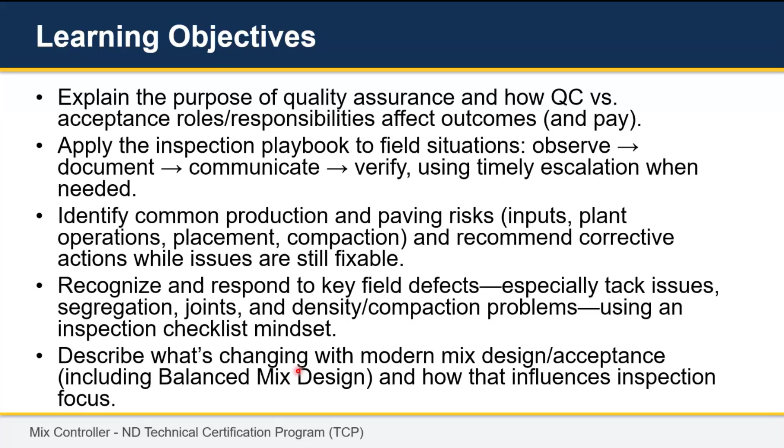And kind of give you an overview of why you might be seeing that and some of the new materials you might use. So, again, same slide I talked about yesterday for those that are repeat customers, if you will. But quality assurance is something that we do. And I often ask people, well, why do we do it? Why do we have inspectors? Why do you have testers? Why do you have sampling and all of this? Why can't you just build the roads?

Okay. The short version of it, again, much like my previous discussion, is Sharon told me I have to be here, right? The version of that is that for federal highway funding, you have to have a quality assurance system. It's mandated by regulation by federal highway on federally funded projects that construction infrastructure projects have a quality assurance system. So that's obviously the direct why. But why is that there?

Why that's there, and the little known or the little acknowledged thing, is that as great as our interstate system was, when it was built, we had fraud, abuse, money not getting spent well. And we're all taxpayers. We all want our money to be spent well. We want to assure that what I'm paying for, what you're paying for, what everyone is paying for, we get what we're asking for, right?

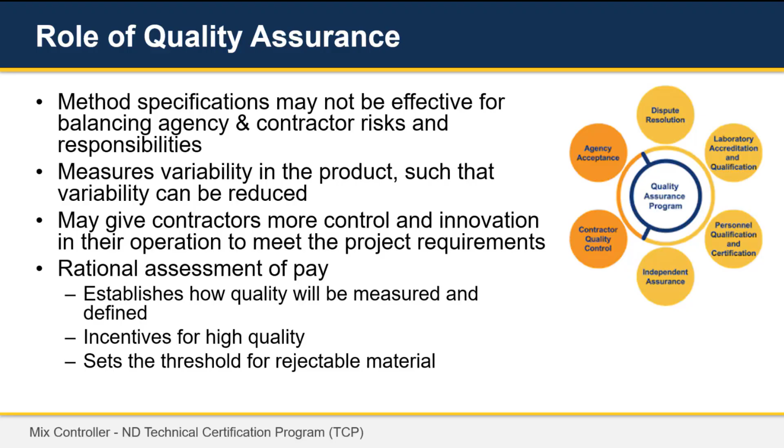And so another point that I made is that inspection and certification and sampling and testing is not something that we dreamed up as our industry. Federal Highway didn't pluck it from an idea internally, okay? It is everywhere. Quality assurance as a concept is widespread in all of these different industries. Again, I said this yesterday.

This is a quality assurance lab at Ben & Jerry's Ice Cream, okay? When I visited their plant facility, you see tests in there, they're bringing the ice cream in and they're testing it to make sure it meets what they want for quality. Healthcare, software development, cars, construction, anything has quality assurance.

The things that make us the black sheep when we compare, say, horizontal construction to maybe vertical construction like buildings, is that we have to deal with higher variability. We have to take rocks out of the ground, all right? And again, I show ledge here. I know you don't have a heck of a lot of ledge, right? You're using natural sand deposits, gravel, etc.

But what we take has a higher variability. The asphalt that we take out of the ground, we refine out of oil. That has higher variability, okay? So we have to deal with that. Whereas in manufacturing, in all these other industries, they have no tolerance for failure. The other thing that they can do that we can't do is if in a manufacturing plant they're making small parts for a car,

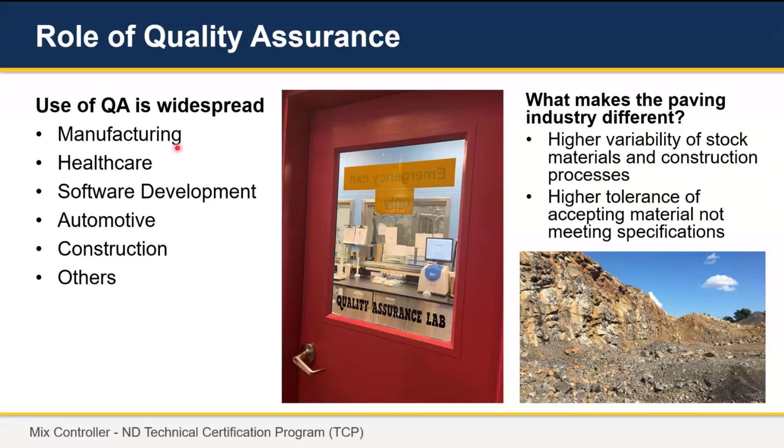So this is my big one. No matter where you are, I see the 58 people here today, whether you're testing for the contractor, whether you're in a DOT lab running gradations, or you're doing mix design as a consultant for a contractor, et cetera, you're going to see yourself fit into here. And I'd ask you to think to yourself, what is my role here?

And the two major roles of quality assurance are the contractor and the agency, the contractor and the owner: the person who's buying it, and the person who's providing it, who's getting paid to do something. So the contractor is providing or making something and getting paid to do it. The owner is taking possession of it. It's theirs, and they're buying it. So the contractor is fully responsible for quality control, right?

A colleague of mine says you can't inspect quality into a project. He doesn't mean that inspectors don't matter, all right? What he means by that is unless the people doing the work want to do a quality job, you can't just inspect it in. The people running the equipment, running the plant, making the aggregate, processing the aggregate, they've got to want to do a quality job, right?

Now, it's also the contractor's job to ensure that what they are making meets the spec, okay? Let me pause for a second and go to the other side. The owner, right? DOT, whoever it is, it's only your responsibility to figure out what the quality of this product is and how much am I going to pay. Okay.

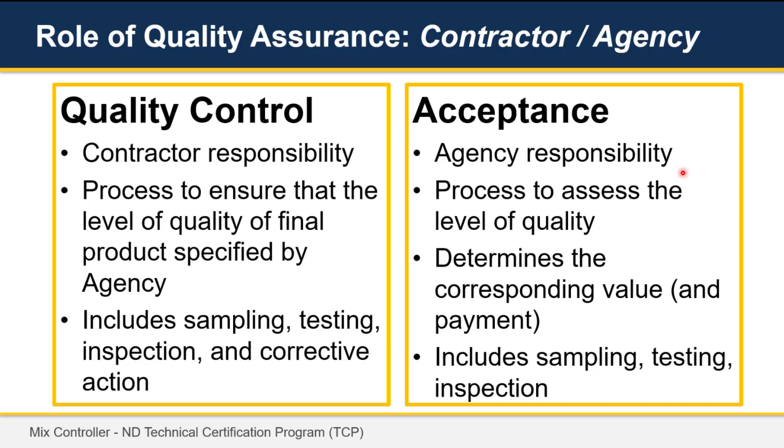And so what am I talking about specifically? What activities in an asphalt mixture world would you see and where do they fit? Okay, so acceptance. This would be something like mix samples at the paver or at the windrow, tested for asphalt content, volumetrics, gradation, maybe some BMD tests. This is actually a picture from North Dakota of some of your Hamburg samples.

Cores are an example. We talked about that with inspectors yesterday. You all take cores for acceptance, right? This is an example of the acceptance function. You're looking as much as possible at the end product and figuring out, okay, what's the quality of this? Therefore, how much do I pay for it?

Okay. Quality control is by the contractor. Something here might be, again, mix samples at the plant. I know that's not common for you. But either way, mix samples at the windrow, again tested for asphalt content, gradation, air voids, something along those lines. It's maybe a little bit simpler distinction in the field.

This is where QC is often doing nuclear density gauge testing during rolling operations, right? They don't have the time for cores. They need quick measurements because they need to make changes, make adjustments. Their primary concern is not how much they're going to get paid. It's: I want to make sure that I'm still meeting spec, okay?

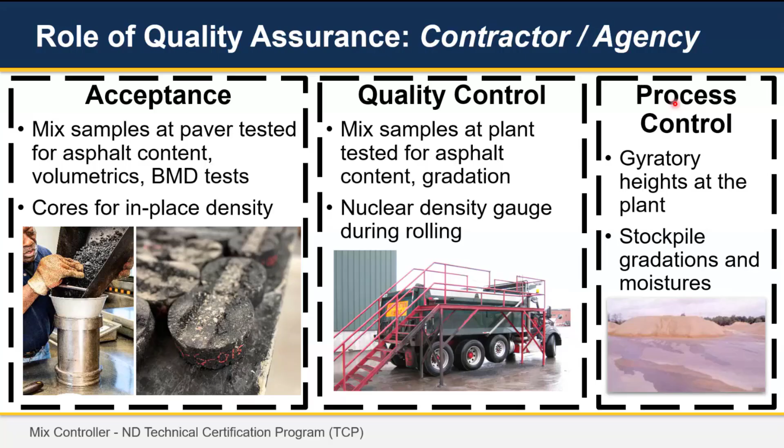An example for me, in a lot of cases, is stockpile gradations and moistures. That may or may not be required by the spec, but in order to make sure that I get good results for acceptance, I'd better be doing them. I've got to know my materials. All right, and this is the distinction. And I'd ask you to ask yourself, where do I fit in here? What testing and what activities do I do? Where am I fitting in these different roles?

An additional one, again, is inspection. All right. We can test all we want. I know we have a lot of testers in this room, right? So I'm not downplaying the role that you have. Tests tell us a lot, but it doesn't tell us everything. I can't just run one test a day or two tests a day or three tests, I don't care how many, 10 tests a day on an asphalt mixture production and know everything about how that pavement is going to perform.

We have a product, asphalt mix, asphalt pavement, even concrete, not a big fan of concrete, but aggregate, whatever, that a test doesn't tell the full story, right? How I build something matters, not just the test at the end of the day. So inspection is necessary to look at the quality of the process, how it is being done, the quality of the product itself, the mixture, and the quantity of the product. That's again more of an inspection in the field thing.

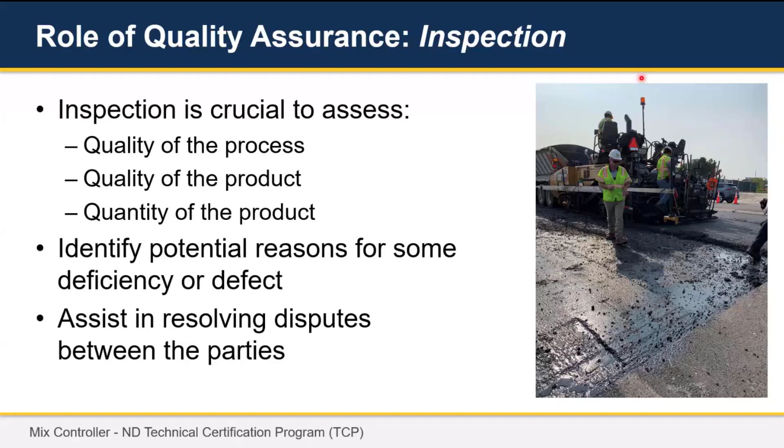And you want to know the reason for any sort of deficiency or defect, because it's going to happen. It's going to happen. And also assist in resolving disputes between parties, right? When we don't agree, when our tests don't agree, whatever that case may be. Our eyes, our ears, all of those things are useful, whether you're representing the owner agency or whether you're representing the contractor. Either one, inspection is important.

And so within inspection and a quality assurance system, your production and QC staff are doing inspections, hopefully, where you're looking at production and placement activities. We'll talk about some of those things in a plant, what I look at first if I go in a plant that's having some issues. The owner agency, you're conducting inspections. Not only looking at the product, but I'm looking at the process that's being built. And I'm also looking at the contractor's QC.

If your spec requires the contractor to do QC testing, you are paying for it. It is a service that provides additional assurance that things are meeting spec, because QC is more often than the owner tests, right? Maybe QC does 4 tests to every 1 for the owner. So it's happening more often. To me, that's a service to have additional confidence, assurance that things are meeting spec.

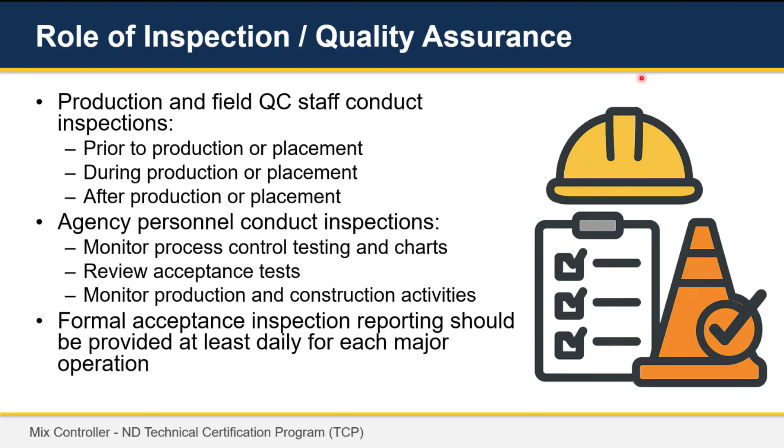We talked about this again with field people a little bit yesterday, but this could be at the plant. This could be anywhere, any inspection operation. I don't care whether it's just the owner, could also be the contractor for those of you doing QC. If I'm really inspecting, I'm going to do 3 things. I'm always observing the materials, the process, what are the results. Even for my testers out there, you may think, well, I'm just a tester. Well, how does the material look? Has it changed? You can still learn something other than just the test. So looking at all of that, documenting is important.

If you are specifically an inspector of some sort, your word is your word, right? Documentation at the time is what matters. If you ever get into a disagreement, a dispute, documentation is what matters. Not, yeah, I remember we were over here. Nope. Is it documented? It doesn't matter if it's not documented. So these are objective facts: times, temperatures, locations, quantities. Again, QC is the same way. If you're doing QC, document what you see, not just I fixed it. Fixed it is fine, but I don't learn anything from it if I don't document it.

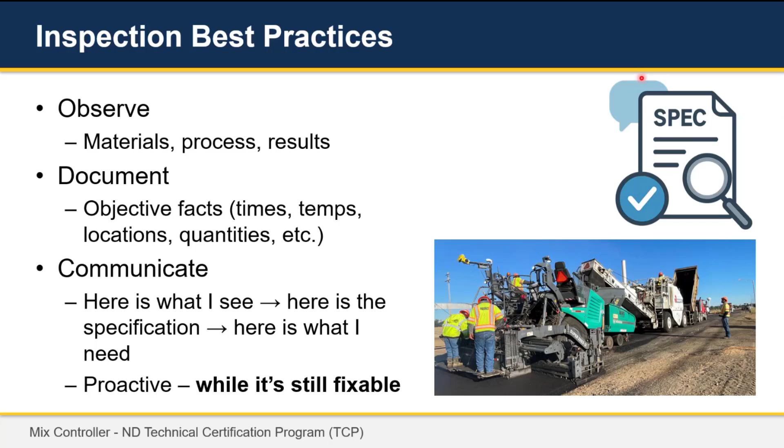So I showed this yesterday, again, more of a placement thing, but if you see an issue, what's the first three things you do? All right. Whether, again, it's a production issue, whether it's a placement issue, this is a technical term, bad looking mat. Okay. All right. So what would I do? Again, I'm just going to show this, as I know we're more testers in here.

Number one, we've got to notify someone if something is going wrong. All right. If something is not meeting spec, plant, field, I don't care. If something is going wrong, we need to talk to somebody who can actually do something about it. And this is maybe aimed towards our agency people. You aren't in control of the plant, right? You're not controlling the plant. You're not controlling production, right? You need to notify somebody who can make some corrections.

You want to document what the heck is going on, all right? Not just walk past it. Oh, you have an issue back there, okay? Doesn't matter whether they're going to fix it or not. Doesn't matter. Okay, you document that it happened no matter what. Right? Your job is to tell the story of what happened on site that day, not whether everything was okay or not, when you're an inspector.

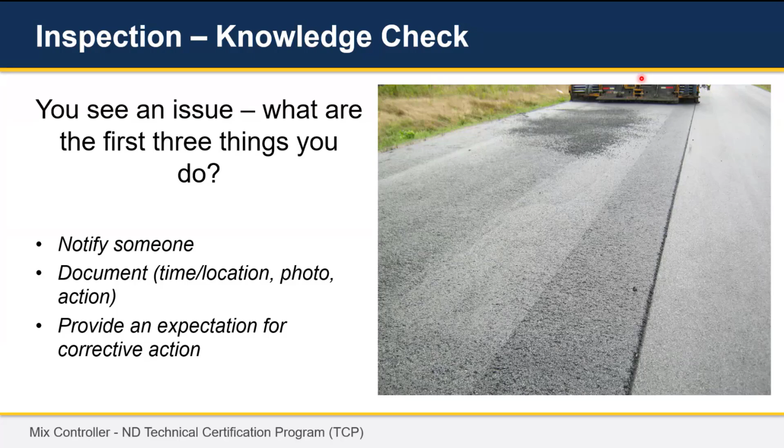And then some expectation for corrective action. Right? We're out on XYZ on this mix property. We need to get back in by the end of the day, or I'll give you this period of time, whatever it is. Okay. And so those are some general thoughts I have on inspection and everyone's role. Okay, testing is a certain part of that, right? And as testers, you have an important role in that.

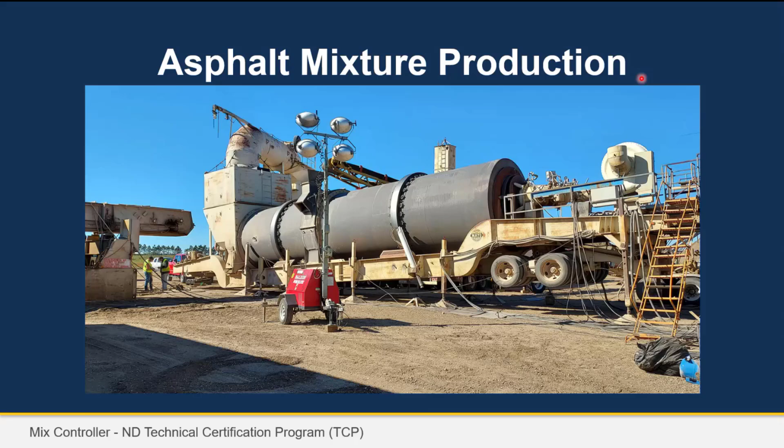So what I want to spend most of our time on after that brief introduction is asphalt mix production, right? I know some of you may not deal with asphalt mixes, you may have different jobs, etc., but this is where I want to spend the bulk of my time today. So making an asphalt mix, all right. Yesterday, for those that were here with me, we were talking mainly about placing it. Today, I want to talk about making it.

So if I think about what am I trying to do, what's my goal, when I'm making an asphalt mix, I want to take the different constituents or the parts, proportion them correctly, heat them up when necessary, and mix it into a uniform mix that meets what I'm trying to make. So I have a mix design, a job mix formula. That's what I'm trying to make. I'm not just making hot top or whatever comes out of the plant. I want to actually make what I'm trying to make. That's why we spend all that time doing a design. So I want to make that, and I want to make it consistently.

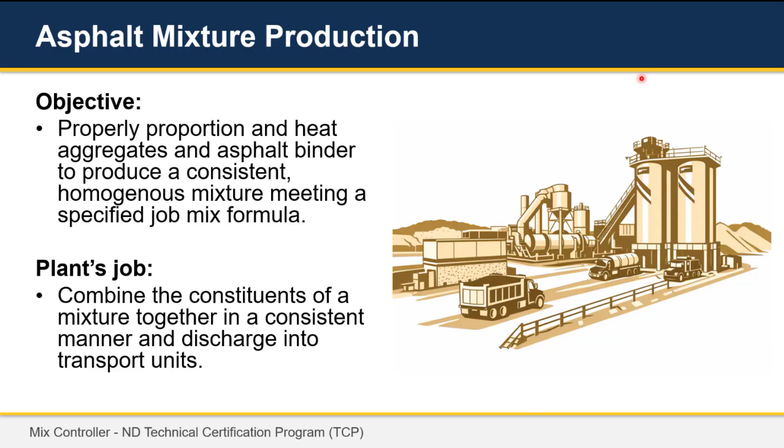So the plant's job, an asphalt mixture production facility, a plant, is to combine these different parts, aggregate, binder, RAP, etc., together, do it consistently, and discharge it into the transportation. Okay, that's its job if I really back up. So what are the ways that a plant actually does that? Number one, no matter whether you're a tester or something like that, I said this yesterday about equipment. If you're testing the material, I think you should know how it's made. Not enough to run a plant, but you should have an idea of how it's made.

So what is a plant attempting to do? A plant is trying to proportion the aggregates, asphalt, any additives, any other materials, right? So I have my job mix formula here, right? This piece of paper calls for 20% of this, 30% of this, et cetera, 5.6% asphalt by weight, whatever the case may be. I want to make that. So I've got to proportion those aggregates, asphalt, and additives. So I've got to feed those into the plant. Feed my aggregates in the cold feeds, my RAP in the RAP collar, binder comes in.

Okay. Then what do I got to do? I can't just mix the aggregate like that. This isn't concrete. Right? This isn't concrete where we want a certain amount of water, so if my aggregate is a little moist, no big deal, and I can account for that. We need our aggregates dry. We don't want water. All right.

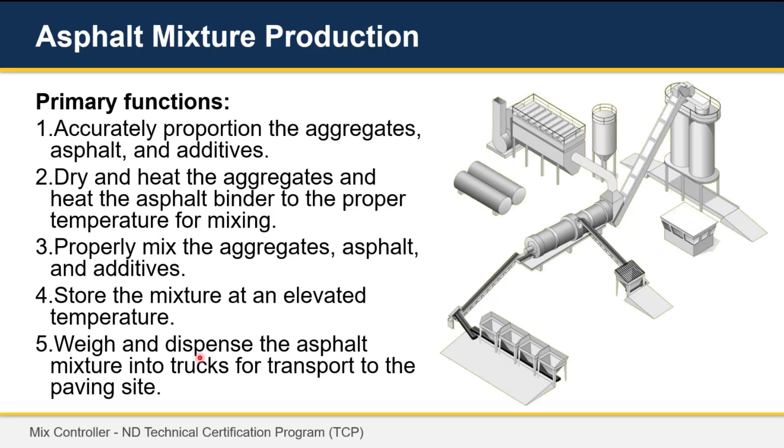So, what I tried to focus on, knowing that this is a recertification class, all right? My job is not to go through every little thing of a plant like you've never seen it. Many of you have seen it, you've tested at it, you do mix designs at it. What I want to talk to you about is the common pain points, all right? What are the common locations for issues? And so these are the items to check to ensure quality production, making sure I'm meeting specs. So if something goes wrong, I'm thinking about one of these areas.

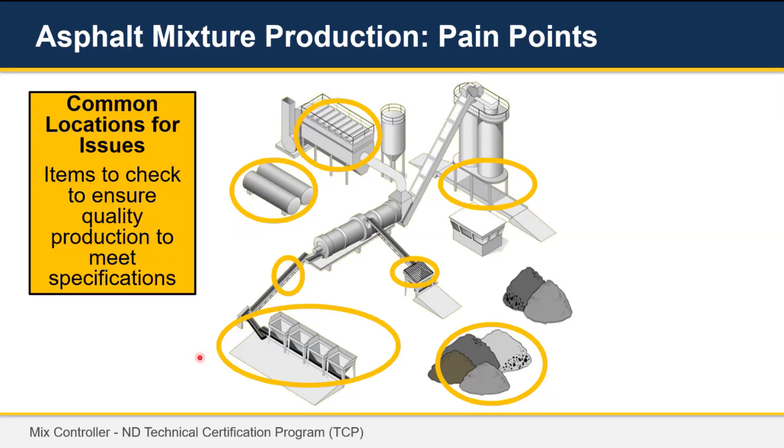Now, I could have circled the whole damn thing at this point, right? From the amount of things I circled. We could come up with a lot of different things, but these I would say are the most common. So I'll try and go through these, give a couple minutes on each. So the first one, if I go in order of kind of making the mix, is number one, stockpiles, okay? Quality starts at your feed material, at whatever I'm using to feed material.

Now, understood, North Dakota, you guys don't have a lot of ledge rock, right? You're using a lot of gravels, right? Pits, etc., are opened up. You have to deal with the aggregate that you have, right? So I would say that you have one of the most challenging situations when it comes to trying to get good stockpiles, because you don't have as many permanent aggregate sources that I can rely on, these kind of static setups. What do we see for best practices when it comes to stockpiles?

All right, number one, try and have multiple stockpiles to reduce variability as much as possible. I think that's probably a particular challenge for you all, right? If I have many different products, I can make them very consistent, through processing, etc. But if I have just kind of one gravel source, that's going to be more challenging. No matter what, I want adequate separation in between stockpiles to prevent cross-contamination.

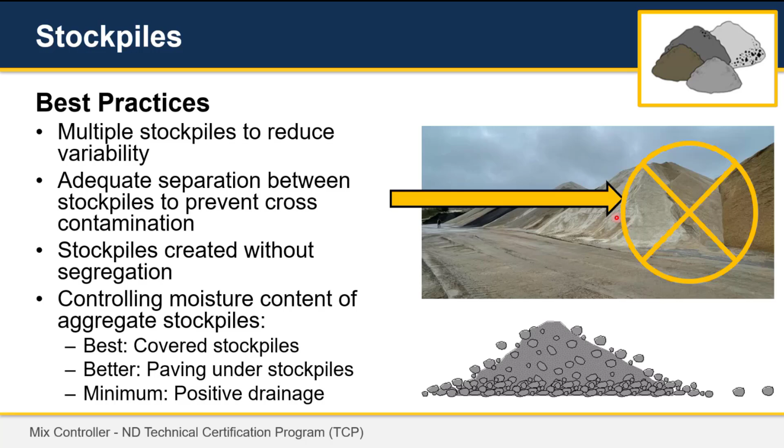Location number 2, cold feed bins. So my cold feeds, the loader operator, I use the word first here. I guess people making the stockpiles control quality first. But once we actually talk about making the mix, the loader operator has a heck of a lot of input.

I'm interested how many of you have spent significant time in an asphalt plant before? I don't know if you can raise your hand. There is a raise hand button. Yeah, I see you on video. Thank you, Don. Significant time, right? I think it's a good idea, especially if you're testing this material. Excellent. Thank you all.

The loader operator is the first line of defense, if you will. If the loader operator's having a bad day, the plant is going to show. So they really have a tough job in a lot of ways, especially if you had a lot of cold feeds. Now again, understanding the materials that you have, you don't have as many cold feeds as others. And as I've talked to Mike and others, you probably have some plants that are almost limited design-wise by the amount of cold feeds that you have.

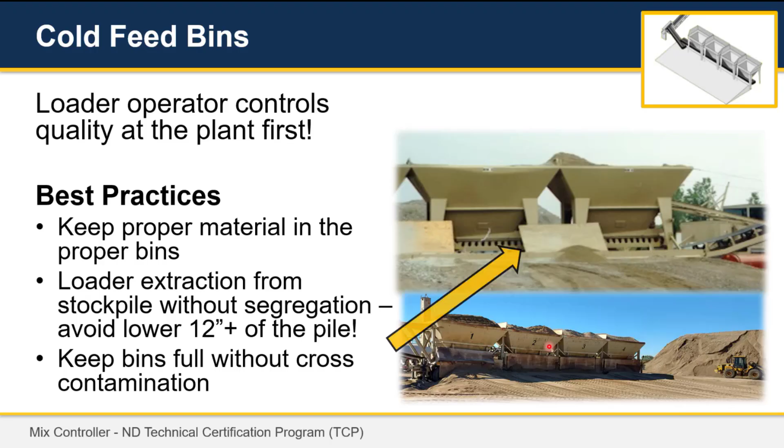So this is actually an older image that shows cross-contamination. This is material that's supposed to be in this bin. Well, it was kind of dumped into both. Does the plant know that I dumped the wrong material into the wrong bin? Nope. It's not that smart. It's going to say, yeah, I got something in here. But, well, there's no way my gradation changed that much. Well, here you go. So keeping these full, staying out of contaminated or bad areas, etc. This picture is from North Dakota, as an example. So don't do that.

Conveyor belt. The conveyor belt is the next spot. Again, knowing your production, I've focused on drum plants here, just knowing that drum plants are more common. Batch plants have a couple things to themselves, but I just didn't think it was worth it given the limited amount of time we have. Drum plants are only as accurate as their scales and the moisture contents.

When we do a drum plant with people making mix, they are assuming a moisture content for the aggregate, because when I weigh it on this belt, it is wet. It might only be 1% moisture; it might be very, very dry. But it has some moisture that we have to drive out, and it's wet when we weigh it. It's going to go into a drum and hopefully get fully dried, so its mass is going to get reduced. So knowing that moisture content is important for consistent production.

That's why it's a quality control or process control term, because the contractor needs to know it to meet specs. Moisture content of the aggregate doesn't get me the end performance. That's why the agency generally doesn't care as much, but the contractor needs to know it in order to meet the specs. So that's where this measurement is important. I believe you guys still do belt cuts for gradation, etc. Most states do it on the mix after it's made, but understood that as well.

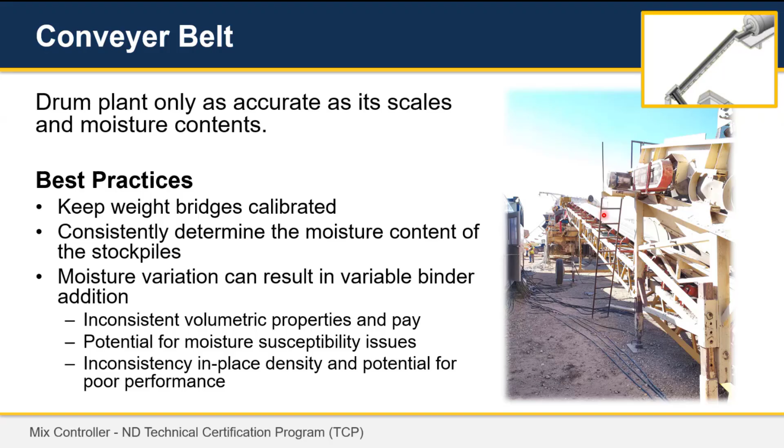RAP. Everyone loves them some RAP, because it's free asphalt, asphalt I don't have to pay for. The trouble is it's old. I could talk your ear off about how to design for the asphalt in RAP, the old aged RAP, and how to handle that. But from a production standpoint, you really need some extra care to effectively use RAP. RAP is not just something I throw in a mix, not for spec mix, not for agency mix. RAP asphalt content is key to maintaining mixture.

This is a picture I took of a RAP source near where I live. I got a little bit of everything in here: what looks more like dirt, old RAP, real old RAP, slabs of old RAP, and new plant waste. Anyone ever heard of a GOK pile? God only knows. That's a GOK pile, and that's not very consistent. So for RAP, the trouble is by the time I make the mix, it's almost too late. Quality begins at the original source and processing.

With a lot of your mix production, this is maybe less on the processing, but when you're in a remote location and the RAP has come from milling the existing road, that milling operation really is my RAP generation. So it's the milling that gets me my quality. Quality control testing during processing and crushing is important. Extra attention to RAP moisture: the finer RAP loves moisture and doesn't want to let it go. The finer it is, the more it grabs that moisture, so this can have an oversized effect on the amount the contractor can produce.

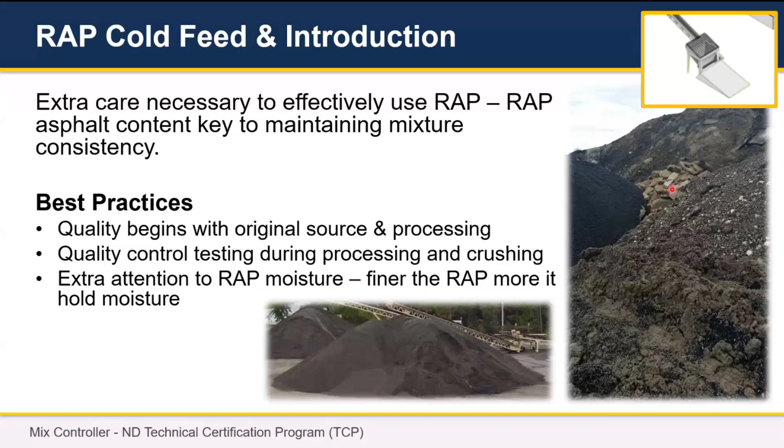If I have really wet RAP, it takes a lot of energy to dry it because I don't heat the RAP directly. I don't put the RAP under a flame. I can't; I destroy the asphalt and actually burn it off, flash it off. What I do in a plant is superheat the aggregates and then put them next to the RAP so that the heat transfers. So I have to expend a lot of energy, fuel, whatever it is, to heat the aggregates to heat and dry the RAP. That's why moisture content is so important to understand.

These numbers are just an example of why knowing the RAP asphalt content is so important. Here I'm using 30% RAP. If the design asphalt binder content is 5%, but the actual stockpile is 0.5% less, if you do the math, you end up with almost 2/10 less liquid than I should. That means too little binder: a stiffer mix, dry mix issues, volumetrics, density, all of that. So knowing the RAP is critically important.

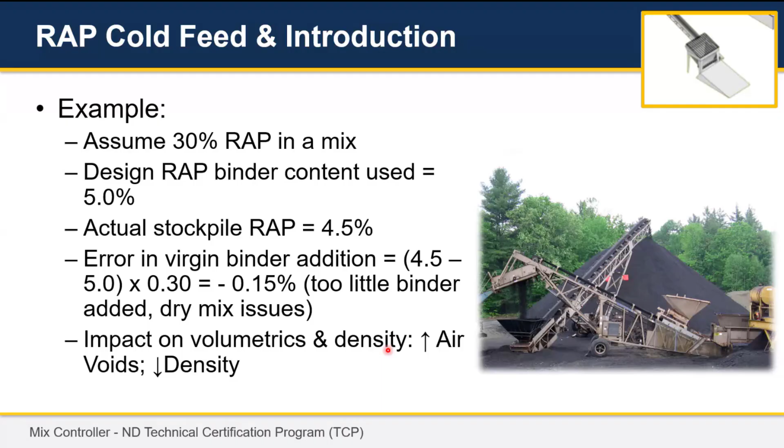Let's talk about binder. Binder storage, whether it's in a tanker truck for your remote locations or a static location that has tanks, vertical, horizontal, the same kind of things apply. Ensuring that the correct asphalt binder is used really is an important QC function. Probably a bigger issue for those of you that work in static setups where you have multiple tanks. If I'm in a remote location, I'm only using one binder for a job, so this might be easier.

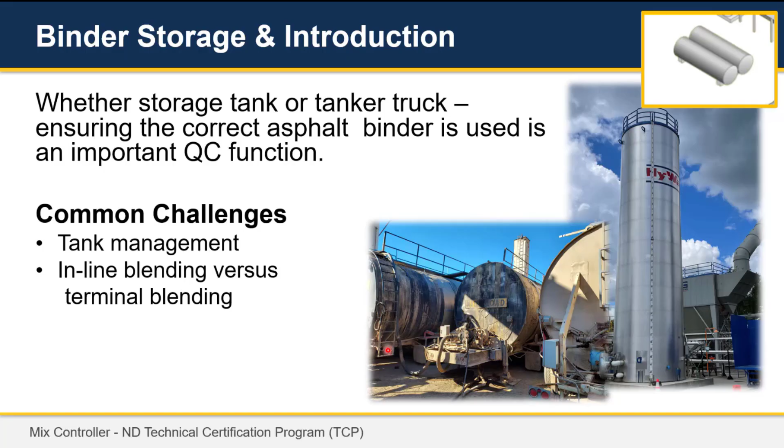I bring in the tanker, etc. But in those static setups, I have to worry about tank management and inline blending, which I'm not a huge fan of. You can do it for warm mix, etc., but it does take some extra care.

Then fines, all right? A particular interest of mine, fines, the baghouse fines, the number 200 material is an important part of an asphalt mixture. Small changes in the dust in the finest portion of our mixture have a big impact on how that mix behaves. I don't know if any of you have seen this, but the same mix design, same mixture, same gradation all the way down, the difference between 4 and 6% dust is huge. Huge. Doesn't sound like a lot, right?

But it is, right? So in a plant facility, the contractor has to consider the factors that affect the effectiveness of the baghouse. Because the baghouse is knocking down the dust that's created in our drums; we don't just vent that to the atmosphere. We've got to knock it down with a house of bags, a baghouse. We don't want to just waste that dust. No one is generally asking for a bunch of dust. So the contractor wants to reuse it, put it back into the mixture.

When we put it back into the mixture, unless it's being weighed in, which most plants don't have the ability to do, how it gets pushed back in changes. How wet the material is, what type of aggregate am I using, the production rate. All of those things affect that feed rate back in. So again, it's a potential source of inconsistency, right?

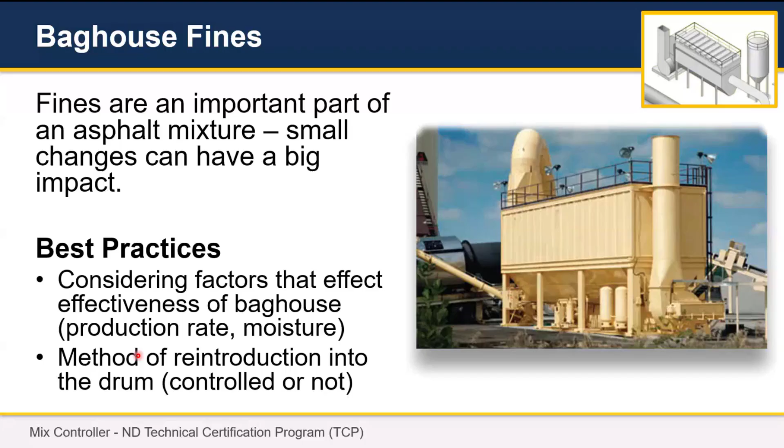Now, again, you are using primarily belly dumps and windrow paving. So when using that, there's less of a need for silo storage because the truck doesn't have to wait, right? I can dump, I can come back. And this is coming from someone from the Northeast: I had never seen a belly dump truck in my life until I joined Federal Highway and started traveling around the country a little bit more. No one uses belly dumps where I've grown up and lived most of my life. We have to wait for the trucks, so we need a lot of trucks.

I really like the idea of belly dumps, that I can bring it out to the site, discharge it, and come back. I can get more done with fewer trucks. It's very good at that. It also reduces the need for having to use a silo, because I don't have to wait for trucks to discharge it. There are more challenges, I would say, with windrow paving once I get out in the field: having the proper windrow, having the right amount, making sure that's enough, it cooling off, etc. So maybe there's less pressure for you to use silos, but we still need to load it out effectively.